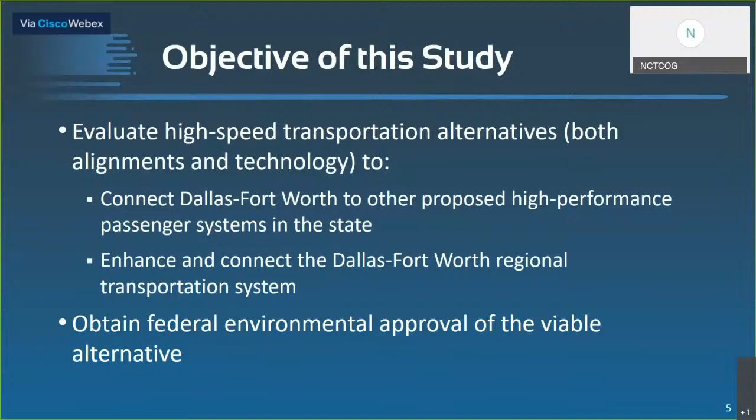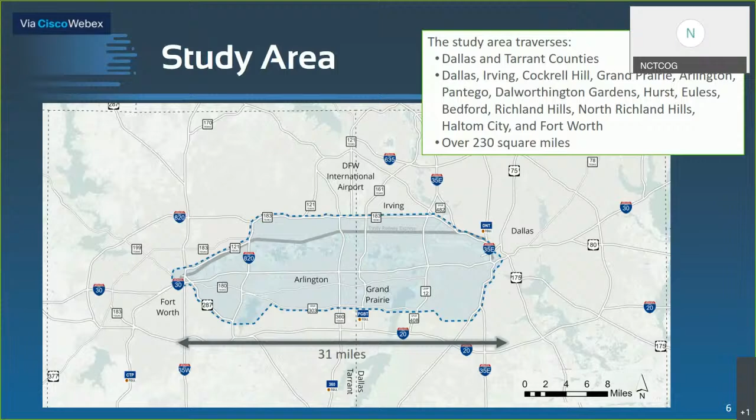The stated objectives will be analyzed in the study area as shown. This area is generally bounded by State Highway 121 and State Highway 183 to the north, Interstate Highway 35E to the east, downtown Fort Worth to the west, and United States Highway 287 and State Highway 303 to the south.

As mentioned earlier, the study objective is to provide a connection to other proposed high-performance transportation systems. This project, highlighted in orange, when completed would connect the proposed Dallas to Houston high-speed rail, highlighted in gray, to a proposed high-performance system traveling south from downtown Fort Worth, highlighted in purple, to areas in Central and South Texas.

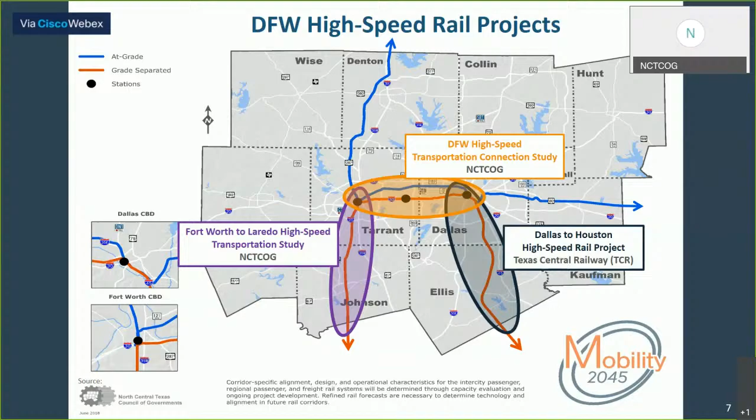The Dallas to Fort Worth high-speed transportation connection study is divided into two phases. The first phase will analyze all reasonable alternatives regarding alignment and travel technology. The wide range of alternatives will be pared down to a small number of recommended travel technologies and a small number of alignment options through a multiple level screening process to be further analyzed in phase 2.

The second phase will be an engineering and environmental analysis as prescribed by the National Environmental Policy Act. The second phase will include conceptual and preliminary engineering tasks. The study will also include financial and project management plans. Phase 2 will conclude with a decision by the federal government regarding next project steps.

Staff anticipates the first phase to take approximately 12 months and conclude in spring 2021. During the first phase, there will be 3 opportunities for the region to participate in the study through public meeting events. These events are currently scheduled for September 2020, December 2020, and April 2021.

The Phase 2 schedule indicates beginning the work efforts in early summer 2021 and concludes in late spring of 2023. This 24-month schedule includes 2 primary public engagement events in early fall 2021 and late summer 2022. As always, questions and comments are welcome throughout the entire project study.

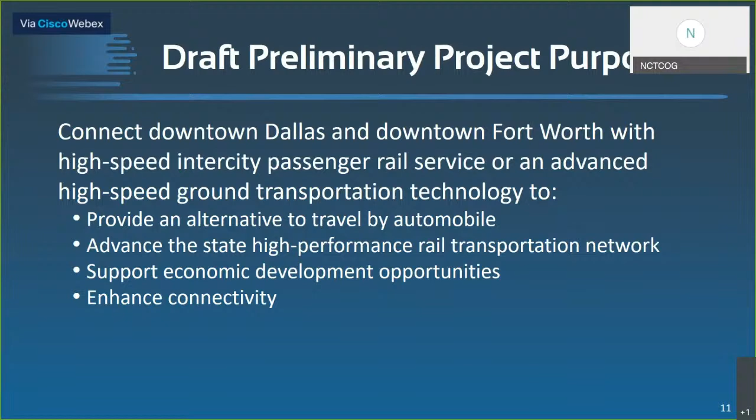One reason for the need to connect the Dallas-Fort Worth region to other metropolitan areas is the region's population and employment growth. The Dallas-Fort Worth region's population is expected to grow by over 50% between 2018 and 2045 to over 11 million people, while employment growth is expected to be over 46% to more than 7 million people employed in the region by 2045. Other metropolitan areas within the Texas Triangle megaregion anticipate very similar population and employment growth over the next 25 years.

With the high population and employment growth in the Dallas-Fort Worth region, the region has increased travel congestion and costs associated with more traffic congestion. The amount of miles all travelers in the region drive is expected to increase by over 56% by 2045. This increase in total miles traveled results in a 59% increase in travel time throughout the region.

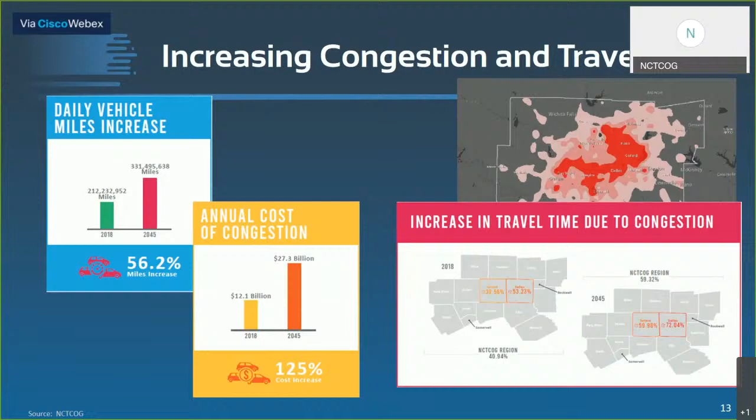Travel time increases due to traffic congestion are expected to be the worst in Tarrant and Dallas counties, with Dallas County travelers expected to experience a 72% increase in travel time above current levels by 2045. The annual cost of the expected congestion to all travelers in the region is estimated to rise by 125% by 2045.

In addition to high population and employment growth in the DFW region, the state of Texas is growing rapidly as well. Population in Texas is expected to grow by almost 38% to just under 41 million people by 2045. This means employment growth will also be fast-paced. Employment in Texas is expected to rise by more than 44% to about 26.3 million people by 2045.

With all of the expected growth in population in Dallas-Fort Worth region and within the Texas Triangle, and the anticipated traffic delays caused by congestion, more and faster travel choices are needed. Additional travel choices will increase connectivity to, from, and within the Dallas-Fort Worth region and will lessen demand on the region's roadways. Additional travel choices will also allow for more reliable travel times and lead to better air quality within the region.

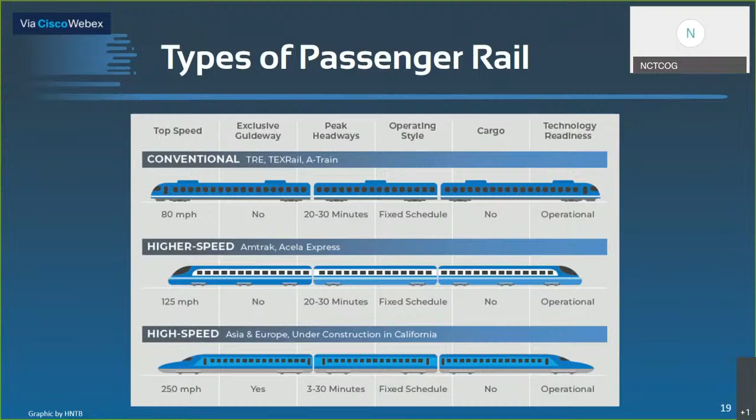These characteristics are identified for conventional trains, higher speed trains, and high-speed trains in the graphic that you see on this slide.

Looking more closely at the design characteristics for each technology, it's important to understand how the footprint and the profile affect the surrounding environment, including the amount of right-of-way width needed. A typical cross-section of each technology gives a view of the technology and its associated infrastructure that's required.

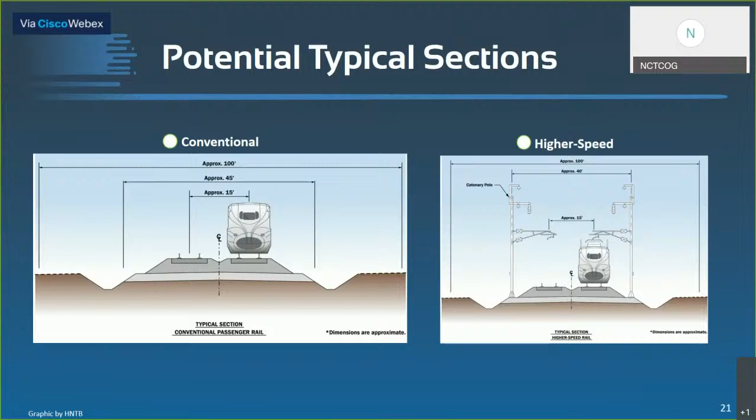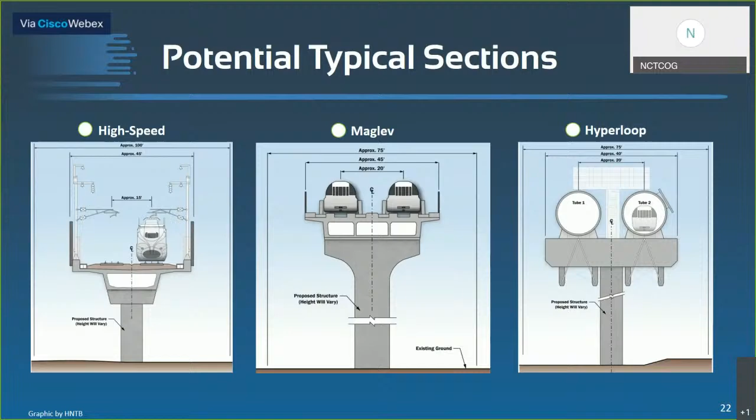Unlike the conventional and higher speed rail typical sections, which are generally constructed on the ground or at grade, the technologies with the highest speeds require the vehicles to operate generally above grade or on bridge structures throughout the corridor. The typical sections for high-speed and maglev, or magnetic levitation, trains and the Hyperloop technology are shown here in this slide. It's important to note, if viable high-speed transportation technologies are analyzed, similar information will be examined as well.

A quick comparison of the technologies examined so far indicates several similarities and differences among the technologies. The similarities include how each technology operates on a fixed guideway or a track of some kind and reaches speeds of over 100 miles per hour.

Each technology requires a similar amount of property for right-of-way, and each needs stations for access to the system and to maintenance facilities. The differences among the various technologies include the type of propulsion system and the number and frequency of station locations. Other differences include the operating schedule and if the technology can accommodate cargo. There are other similarities and differences among the technologies, but this slide identifies those major components.

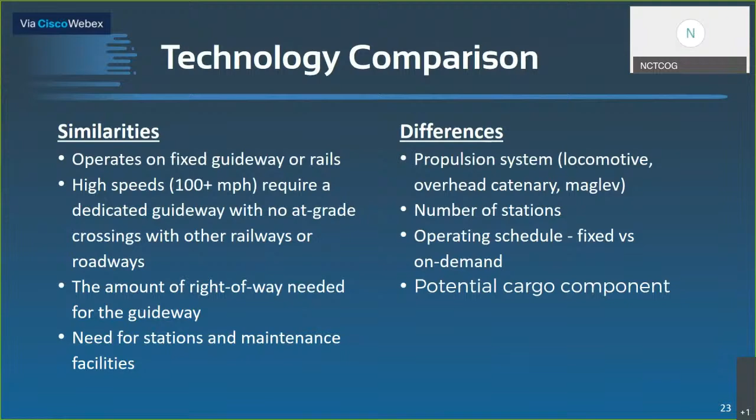In addition to analyzing several high-speed modes or technologies, we'll also be looking at a large number of potential alignments or corridors within the study area.

Using previous transportation studies that have already been completed within the study area, we'll be using those as a base. There are corridors that were developed previously during those studies. We're using that as a base and building upon that, looking at additional corridors as well.

We're trying to use the existing transportation corridors as much as possible so that we can avoid potential right-of-way impacts and potential property acquisitions, really minimizing the impacts to surrounding land uses, including homes and businesses.

It's important to note that all of the corridors we are analyzing in this study have the same endpoints. We'll be connecting to the proposed downtown Dallas high-speed rail station on the east, the proposed station for the Dallas to Houston high-speed rail project, and on the west, we'll connect at the Fort Worth Central Station.

At this point, we've identified 43 end-to-end alignments or corridors, but we know there may be other ideas out there. As you flip through the materials and look at the maps coming up, if you think of additional alignments or corridors we should consider, please note that on your comment form and we will look into it.

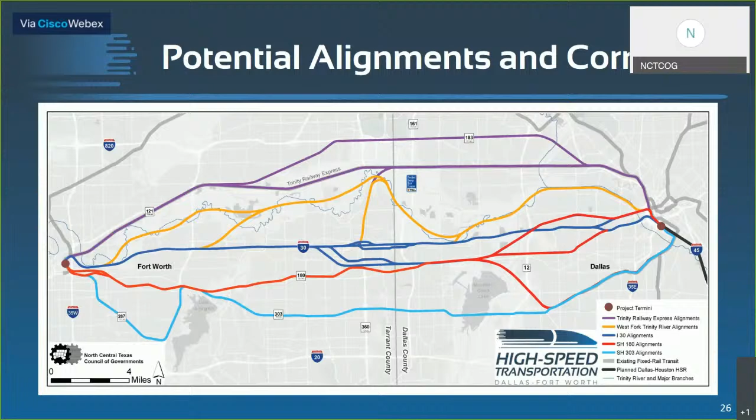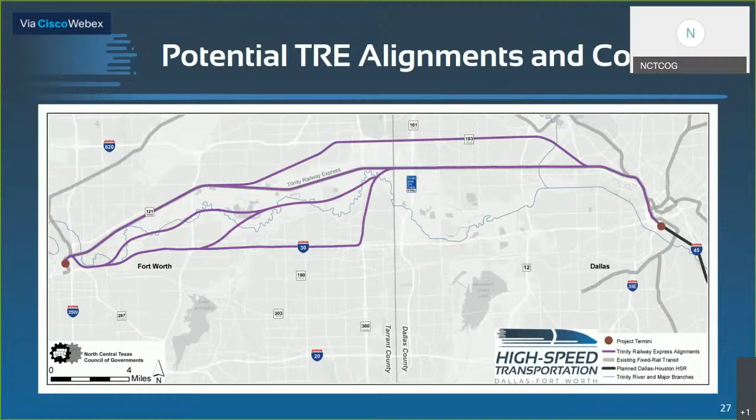These alignments leave the Fort Worth Central Station along the TRE corridor, paralleling SH121 to IH820, and generally continue along the TRE corridor into downtown Dallas, with an optional deviation departing the TRE corridor at SH10 to SH180, reuniting with the TRE corridor at its junction with IH35E in Dallas. Another alternative follows IH30, leaving downtown Fort Worth before heading north along SH360 in Arlington, then east along the TRE corridor into downtown Dallas.

The next map shows the proposed Trinity River corridors. These generally follow the west fork of the Trinity River between downtown Fort Worth and downtown Dallas. The alignments parallel the IH30 corridor, leaving downtown Fort Worth before turning north to align with the west fork of the Trinity River at the following locations: near Beach Street in Fort Worth, just east of IH820 in Fort Worth, at SH360 in Arlington, and just east of Beltline Road in Grand Prairie. Once east of SH360, the alignment generally follows the Trinity River into downtown Dallas.

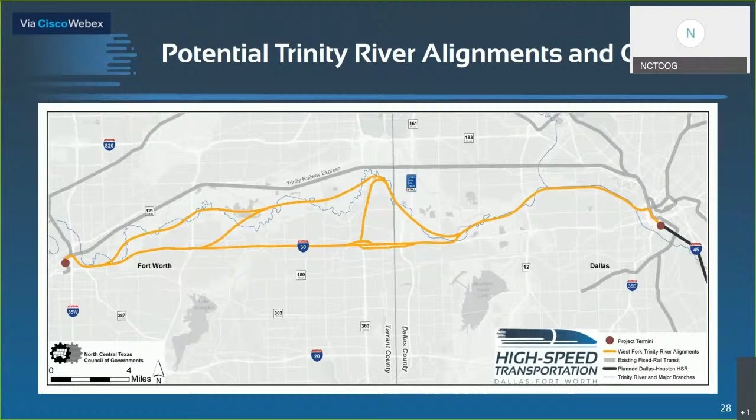The next map shows the potential IH30 corridors. This family generally follows on or near the IH30 corridor between the two downtowns. Some alternatives include minor and moderate deviations in the Arlington and Grand Prairie areas to avoid potential impacts to the SH360 and President George Bush Turnpike interchanges with IH30. There are also a couple of deviations off of IH30 east of Loop 12, one of which runs parallel to the Union Pacific Railroad corridor north of IH30 and into downtown Dallas.

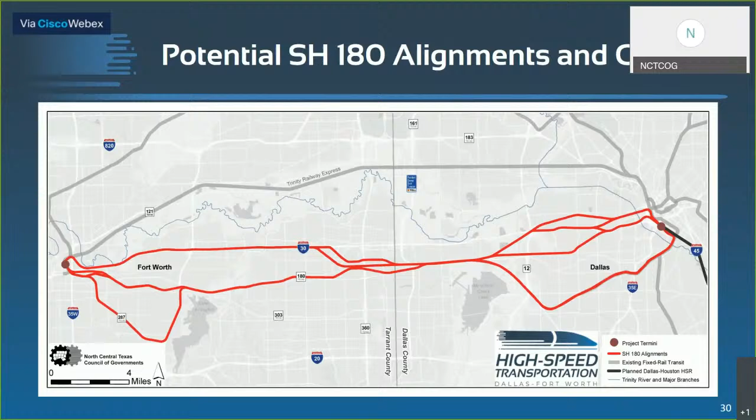The map here shows the potential SH180 family of alignments. These corridors follow SH180 for a good portion of their routes. While most of these alternatives follow SH180 leaving downtown Fort Worth, some alignments follow IH30 before joining SH180 near SH360. Heading east along SH180 through Grand Prairie, these alignments diverge just west of Loop 12 into a variety of alternatives, including paralleling the Union Pacific Railroad tracks into downtown Dallas. One alternative continues along West Davis Street and Fort Worth Avenue to IH30 into Dallas. Another crosses the Mountain Creek Lake Dam, heading southeast to parallel the DART Red Line to the Dallas High-Speed Rail Station.

Finally, the last family of alignments is the SH303 family. These generally follow SH303 and the southwest leg of the DART Red Line between downtown Fort Worth and downtown Dallas. On the Fort Worth end, one alternative parallels SH180, leaving the Fort Worth Central Station, heading to IH820 before following SH303, while the other alternative follows US287 and IH820 before turning east to align with SH303.

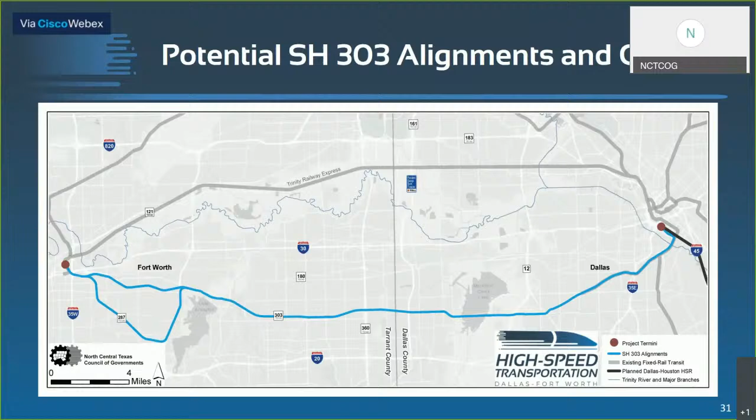This gives an overview of the 5 families of alignments we're considering in our evaluation. The various technologies and 43-plus alignments will be carried forward into our alternatives evaluation and into the level 1 screening.

You see here the proposed evaluation methodology for our evaluation. There's a 3-level screening process to pare down the vast number of possible options to select a few by the end of the first study phase, which is scheduled to end in spring 2021. The process is depicted on this graphic.

It begins with identifying all possible alternatives. That's the blue box where we are today. This is where we need your help. If you have an option that the team has not thought of so far, please fill out the comment form and let us know.

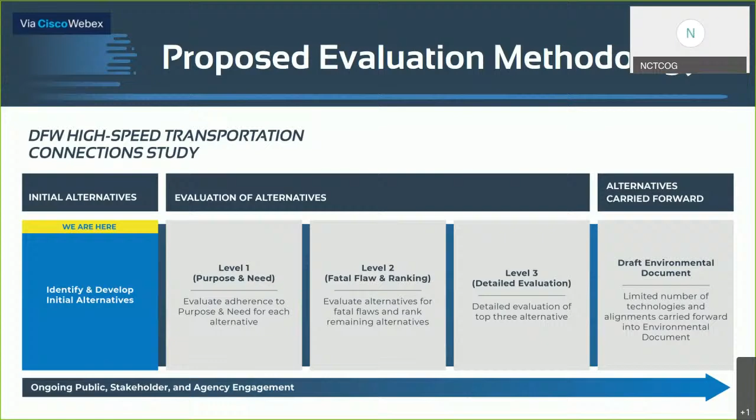The first level of evaluation for the alternatives is to determine if the alternative meets the project purpose and need. The alternatives that meet the project purpose and need then move to the second level evaluation, which focuses on identifying what may preclude the alternative from being built. Finally, the alternatives deemed to not have a fatal flaw are then put through a more detailed and stringent third level evaluation. The goal is to complete the third level with a limited number of technologies and alignments or corridors to be evaluated in the project's second phase.

To provide a little more detail on the various screening criteria, you'll see on the graphic we have here the 3 levels. Level 1 with the ability to meet purpose and need. Level 2, we'll be looking at fatal flaws and ranking. And level 3 is our detailed evaluation.

Level 1, we actually have 2 primary criteria and then a number of secondary criteria. The primary criteria we consider fatal flaws. Each of these alternatives needs to serve downtown Dallas and Fort Worth at the proposed high-speed rail station in Dallas and at the Fort Worth Central Station in Fort Worth. Additionally, they need to have competitive travel time to auto and to the existing TRE service. If they do not meet these 2 criteria, then they're not evaluated further into the analysis.

Our secondary criteria looks at safety, reliability, and convenience. We also look at potential linkages to other high-performance transportation systems throughout Texas. We also look regionally here within the DFW area at linkages to existing regional and light rail. And finally, we also look at providing improved access to major activity centers within the study area.

In level 2, we dive down more into the individual alignment level. We look at proximity to sensitive social, biological, and cultural areas. We look at potential community impacts. From a technology standpoint, we look at technology maturity—some of these technologies have been around for decades, others are just emerging—as well as design criteria associated with each of the technologies, and if a regulatory approval process is in place or not. We also look at capacity, travel time, compatibility with existing infrastructure, and then operational considerations as well—how these technologies work in the real world.